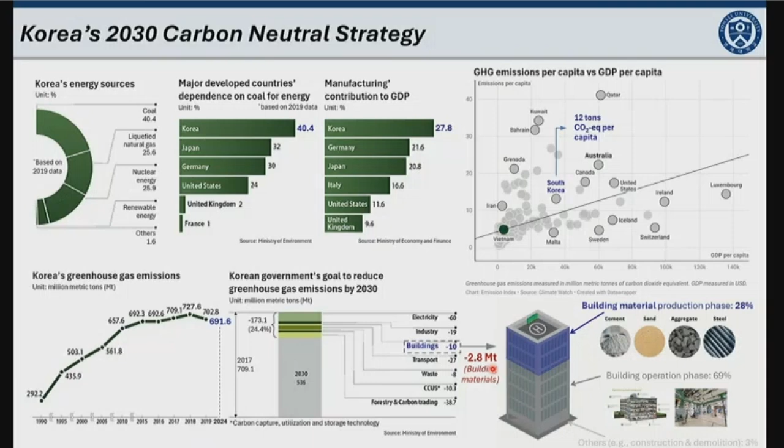In the building sector, approximately 69% of greenhouse gas emissions occur during operation, while about 28% arise from materials production. Therefore, from the perspective of construction materials, a reduction of 2.8 million tons of greenhouse gas emissions is required up to 2030. One of the major greenhouse gases is carbon dioxide, which is significantly produced during cement production.

The global cement market size in 2023 was $410 billion, and it is expected to increase up to $650 billion in 2033. The increase of market size is good for our industry. However, in terms of environmental sustainability, as a scientist, we need to reduce cement consumption. As we already know, 1 ton of cement production produces approximately 0.9 tons of carbon dioxide equivalent, mainly caused by fossil fuel use and calcination in the clinker kiln system.

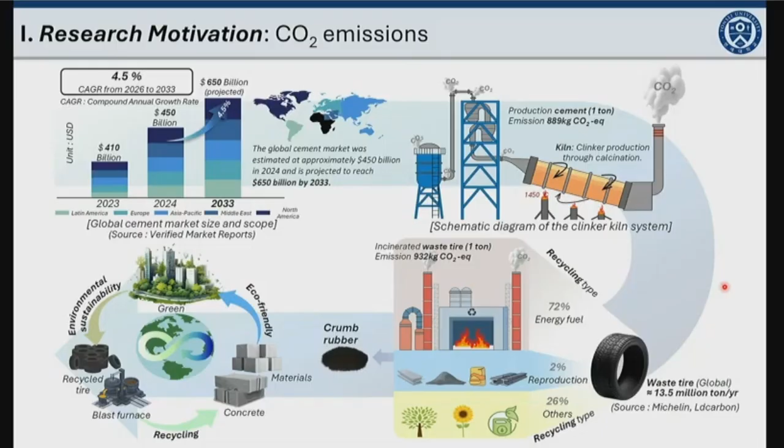In addition, approximately 13.5 million tons of waste tires are generated each year. Among them, 72% of waste tires are used as energy, producing 932 kilograms of CO2 equivalent per unit, while only a small amount of waste tires are recycled into other products. Therefore, to achieve environmental sustainability in construction materials, it is necessary to develop cement-free concrete incorporating such waste material.

To reduce cement consumption, the concept of alkali activated concrete was first introduced in the early 20th century, a long time ago. In this approach, precursors are typically activated using sodium or potassium-based activators. However, such activators generate significant heat in the solution, requiring the solution to be prepared at least 1 day or a few hours before mixing. In addition, because setting occurs extremely rapidly, sometimes within just a few tens of minutes, practical applications in large-scale structural elements remain highly challenging.

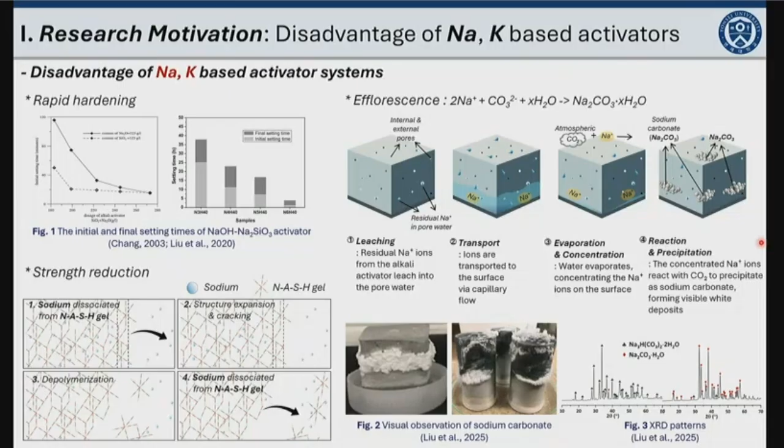The sodium ions also tend to leach continuously from the relatively weak N-A-S-H gel, which not only reduces long-term strength but also leads to efflorescence. As a solution to these limitations, calcium-based alkali activator was recently proposed. Since the calcium-based activator is similar to the early hydration product of ordinary cement, it can effectively prevent rapid setting. In addition, this can promote the formation of C-A-S-H gel, which exhibits stronger bonding than the N-A-S-H gel, thereby mitigating the long-term strength reduction and suppressing efflorescence.

Such new activators can be obtained as byproduct from seawater-based industrial processes. For instance, wastewater rich in magnesium and calcium ions, generated from refined salt production, can be utilized. In the first step, the pH of the wastewater is adjusted using sodium hydroxide. As the pH increases, the magnesium and calcium ions in the wastewater react with hydroxide ions, precipitating as calcium hydroxide and magnesium hydroxide. The calcium hydroxide typically begins to precipitate at pH levels above 11. In addition, XRD and TG analysis confirm that the resulting byproduct is crystalline calcium hydroxide.

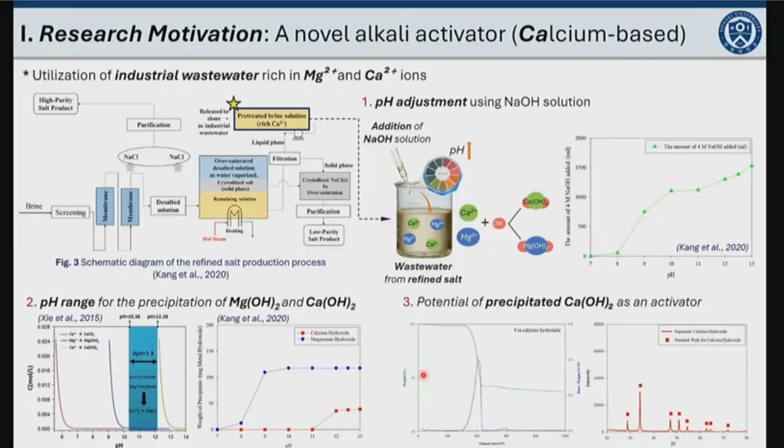So we adopted calcium hydroxide as a new activator for fabricating the cementless strain-hardening slag composite. This is the chemical and geometrical properties of raw materials and mixed proportions. The blast furnace slag was used as the main binder instead of cement, and it is activated by the powder type calcium hydroxide.

The XRD patterns of the slag and silica fume show that they have high amorphous phases with small quantities of crystalline minerals. Also, the size of crumb rubber was quite similar to that of silica sand.

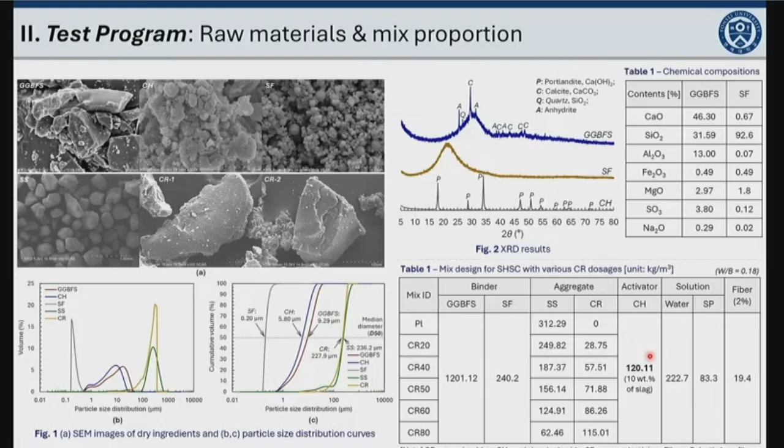The silica sand was progressively replaced with crumb rubber up to 80% with an interval of 20%. The amount of calcium hydroxide was determined to be 10% by weight of the slag based on preliminary tests for pH and chemical concentrations in the pore solution and thermogravimetric analysis.

This is the mixing process and pre-treatment of the crumb rubber. The waste crumb rubber contains stearate, which originates from the zinc-based fillers used in tire production. Due to its hydrophobic nature, zinc stearate weakens the interfacial bonding with the matrix.

To address this issue, the waste crumb rubber was pre-treated with a 10% sodium hydroxide solution to remove the zinc stearate layer from its surface. The detailed process is shown here. According to the EDX result, the zinc was completely eliminated, while a small amount of hydrophilic sodium hydroxide was found to remain on the surface.

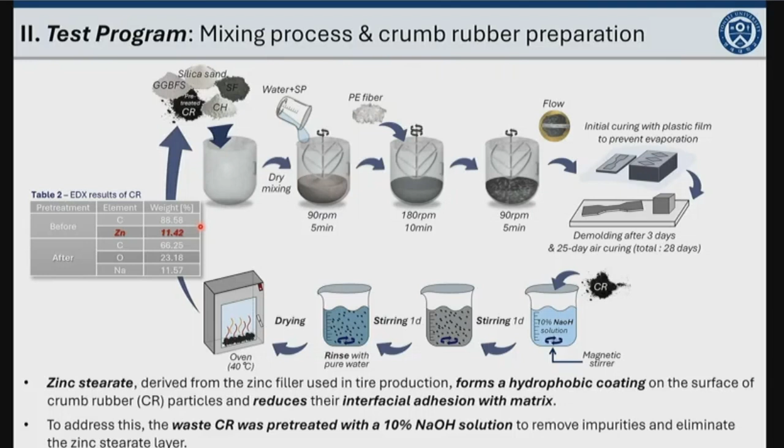The pH in the pore solution, as you can see here, increased by increasing the amount of calcium hydroxide. Most importantly, from 7.5 to 10%, there was the largest increase of the pH value. In addition, the silicon concentrations in the pore solution start to decrease obviously from 7.5% of calcium hydroxide, meaning the lower calcium and silicon ratio in the CSH gels, which is effective for strength enhancement.

Based on the derivative gravimetric result, 10% and 12.5% of calcium hydroxide produce the highest amount of CSH gels. So even though it is difficult to conclude that 10% calcium hydroxide is the absolute optimum dosage, this level is close to the optimum in terms of the hydration reactions. Therefore, 10% calcium hydroxide was adopted in this study.

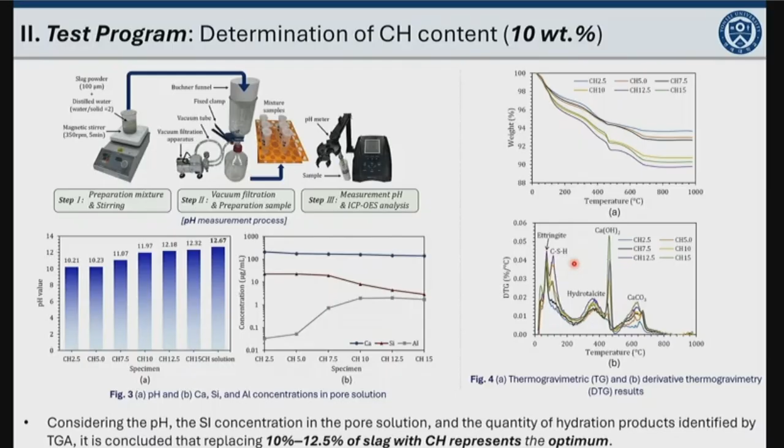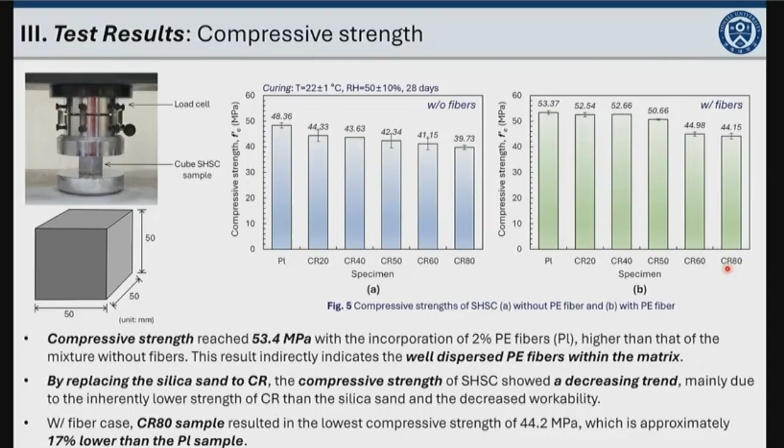By replacing the silica sand with crumb rubber, the compressive strength showed a decreasing trend caused by the inherently lower strength of the crumb rubber compared to silica sand. In the case of 80% replacement, the lowest compressive strength of 44.2 megapascal was obtained, which is approximately 17% lower than the plain sample.

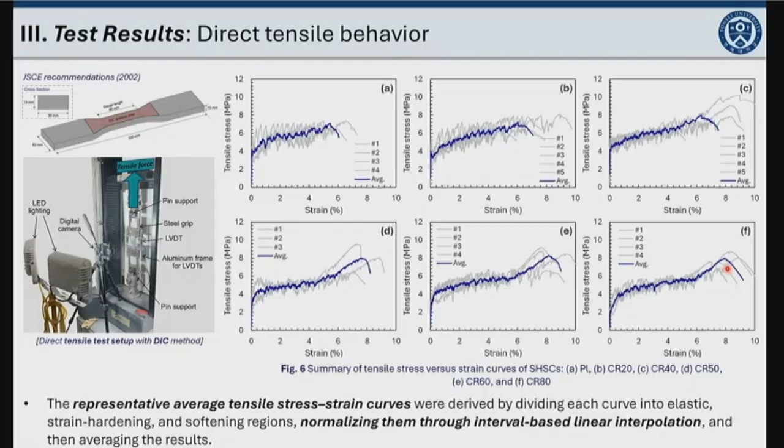Following the Japan Society of Civil Engineers recommendations, we conducted the direct tensile test. Initially, 5 dogbone samples were fabricated and tested for all tested variables. However, by excluding some specimens that developed cracks at the neck, 3 to 5 specimens were used for obtaining the average data. The tensile stress and strain curves were then averaged by interval-based linear interpolation.

This is the average tensile stress and strain curves with various dosages of crumb rubber. The plain sample, gray line here, exhibited the general strain hardening behavior. By replacing the silica sand up to 40%, even though the tensile performance was improved, there was no change in the shape of the tensile stress and strain curve.

However, when the replacing ratio was 50% or higher, the initial post-cracking stiffness was obviously reduced, and there was a re-increase of the tensile stress, indicating the second strain hardening behavior. This is caused by the decreased matrix cracking strength due to crumb rubber acting as flaws, and the synergistic crack bridging effect of the crumb rubber and polyethylene fibers, as you can see here. The crumb rubber effectively bridges the micro cracks.

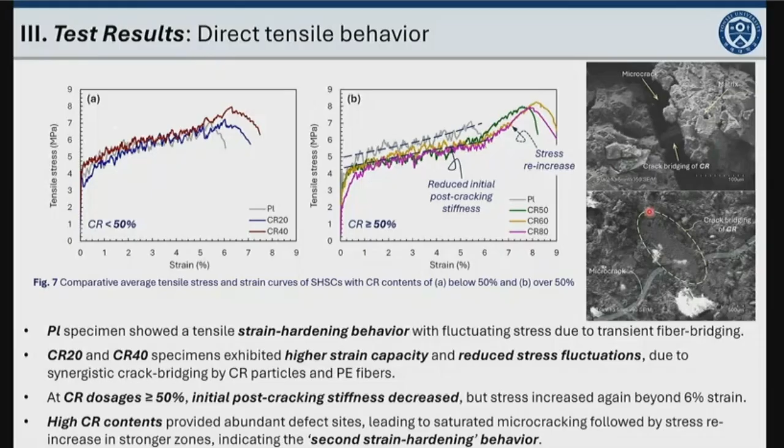This is the schematic description of flaw size tailoring in strain hardening cementitious composites such as ECC, engineered cementitious composite. To achieve slow strain hardening behavior with fully saturated micro cracks, the Griffith-type crack needs to be changed to the steady state flat crack with limited crack openings. For this, artificial flaws having a size greater than the critical flaw size need to be provided, which is the crumb rubber in this study.

This is the typical tensile behavior of the CR60 specimen. After initial cracking here in the matrix, a general slow strain hardening behavior was observed up to a strain of about 5.5%. For this reason, multiple microcracks could be fully saturated in the flaw-dense zone with enough crumb rubber.

However, after this point, the tensile stress starts to re-increase with the formation of additional cracks in this zone with only few or insufficient amount of crumb rubber. Once it reaches the bridging strength of the polyethylene fibers and the crumb rubber, tensile softening behavior with crack localization was observed. Therefore, this second strain hardening behavior is caused by the insufficient dispersion of the crumb rubber.

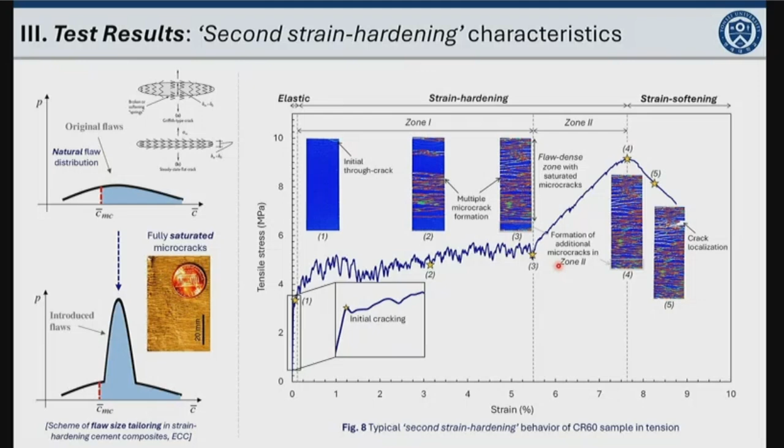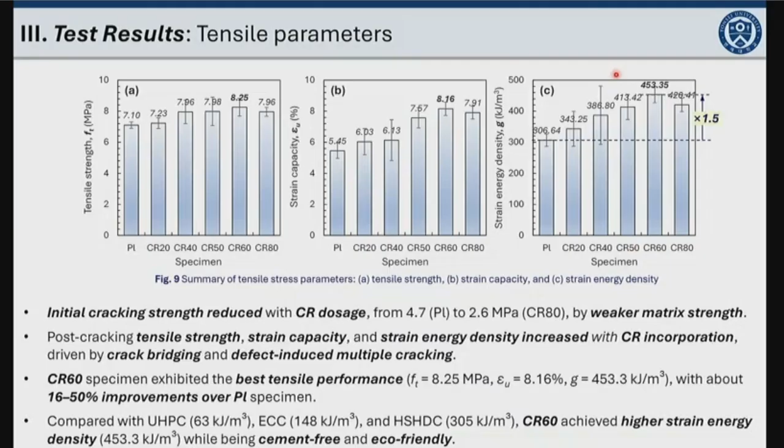And this is the summarized tensile parameters. As you can see, the crumb rubber dosage of 60% was the optimum, providing the best tensile performance with strain energy density of about 453 kilojoule per cubic meter, which is approximately 1.5 times higher than that of the plain sample. And this is the crack parameter analysis.

The plain and CR20 sample show the fewest microcracks and the widest crack openings, over 300 micrometers at the peak strength. However, by incorporating the crumb rubber more than 50%, the cracking behavior was significantly improved with smaller crack width and higher number of microcracks.

The CR60 sample showed the best cracking performance with the smallest crack width, and it successfully maintained the crack width below 180 micrometer, which is the self-healing threshold, up to a very high tensile strain of 7.3%.

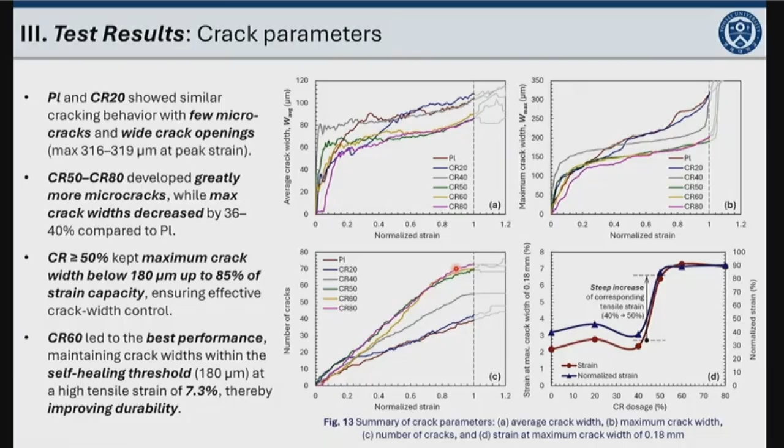And this is the typical microcrack pattern comparison between the plain and CR60 samples. As compared to the plain sample, by incorporating the crumb rubber, the maximum crack width was more effectively controlled, especially in the strain hardening zone.

So for the case of the plain sample, the maximum crack width continuously increased in the strain hardening zone. But for the CR60 sample, the increase of the maximum crack width was more effectively prevented, especially in the strain hardening. In addition, it was obvious that the CR60 sample produced fully saturated and much more microcracks at the peak point compared to the plain sample.

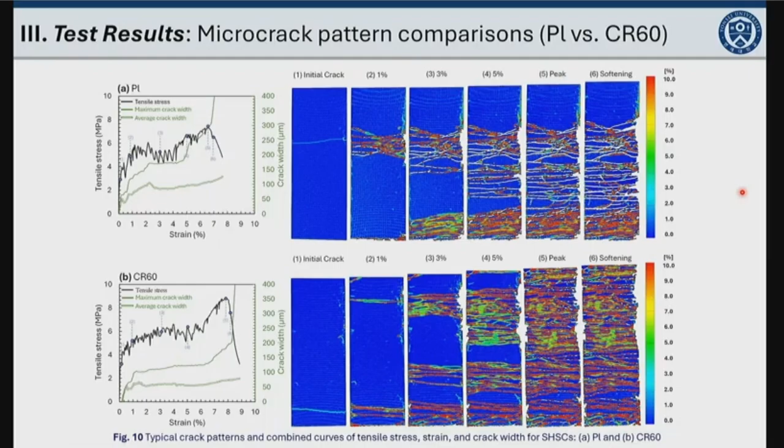This verifies the benefits of using crumb rubber in terms of decreased matrix crack tip toughness and increased crack bridging effect. And this is the comparative normalized tensile behavior of strain hardening slag composite developed in this study, and the commercial steel reinforcing bars, steel rebars.

The CR60 sample showed the highest strain capacity among the strain hardening slag composites, surpassing grade 500 rebar and reaching about 60% of grade 400 steel rebar, confirming its exceptional tensile ductility.

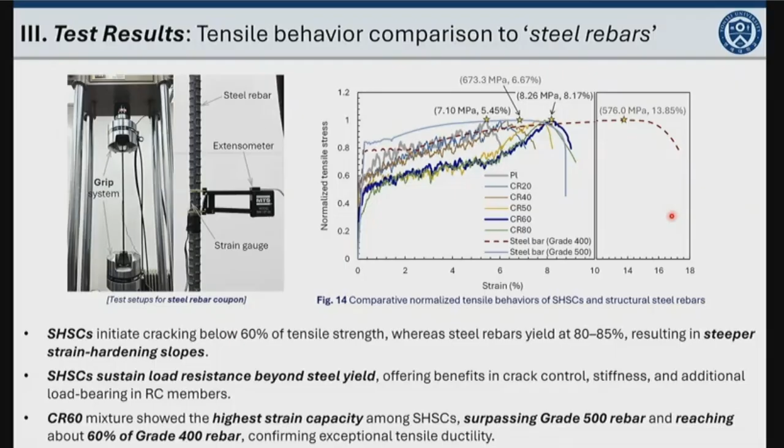However, to fully eliminate conventional steel rebars from structures in the future, that is actually my goal, in terms of reducing construction costs and mitigating CO2 emissions, the strain capacity needs to be further increased.

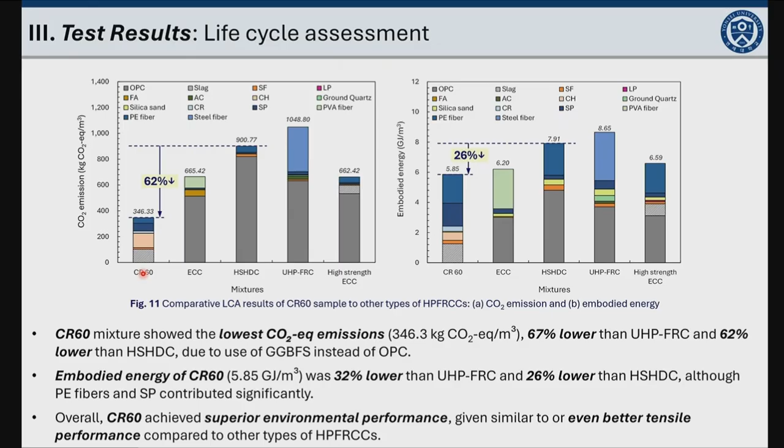And this is the concluding remarks. Replacing silica sand with crumb rubber reduces the compressive strength of strain hardening slag composite. The lowest compressive strength of 44.2 megapascal was observed in the CR80 specimen, representing a 17% reduction compared to the control sample.

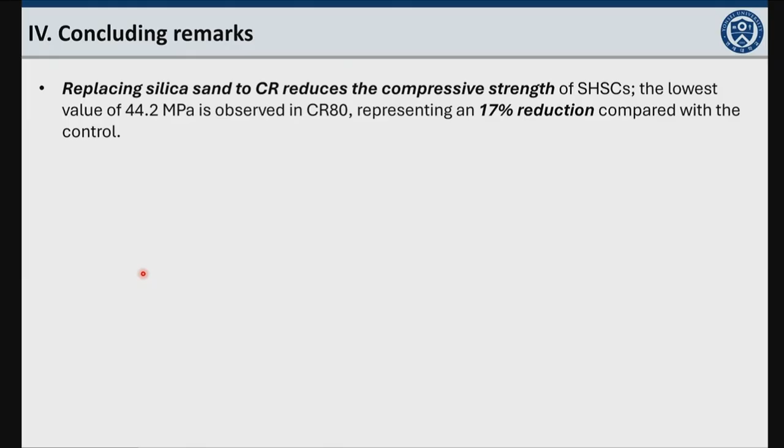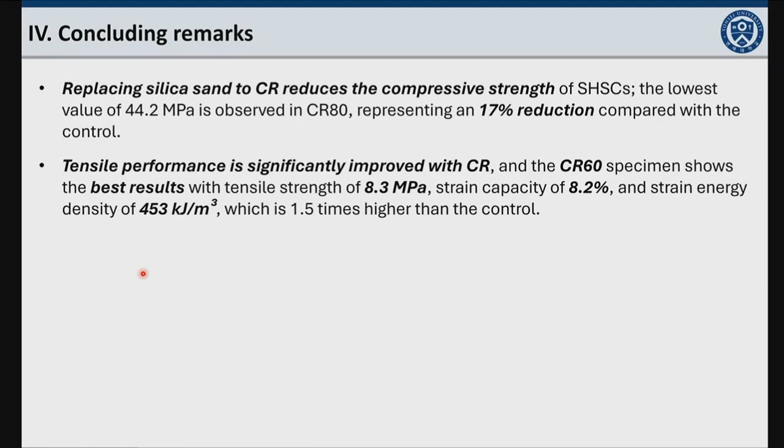And the tensile performance is significantly improved with the crumb rubber. The CR60 specimen shows the best result with a tensile strength of 8.3 megapascal, a strain capacity of 8.2%, and strain energy density of 453 kilojoule per cubic meter, which is 1.5 times greater than the control sample.

And the CR60 mixture provides excellent crack control, forming about 70 microcracks, fully saturated in the gauge length, and maintaining the maximum crack width below 180 micrometer up to the strain of 7.3%, which ensures enhanced durability, especially through the self-healing capacity.

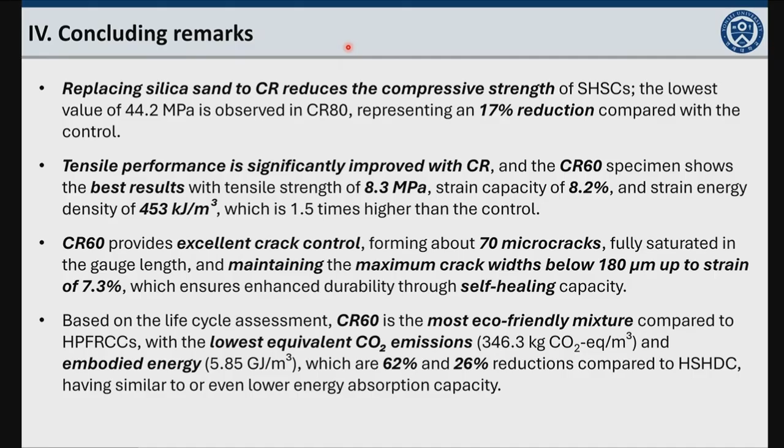And based on the life cycle assessment, the CR60 mixture developed in this study is the most eco-friendly mixture compared to other types of HPFRCCs, with the lowest equivalent CO2 emissions and embodied energy, which are 62% and 26% reductions compared to high strength and high ductility concrete.